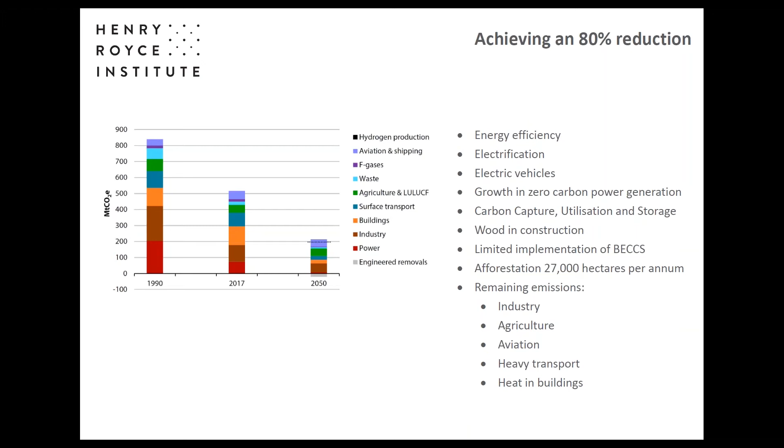And if we look at what we need to do to get there, well, we need to really get the last emissions out of our electricity system, and we quite likely need some hydrogen to do that. Buildings is an area of real challenge. All sorts of new technology is going to be needed, new insulation materials, and also probably some hydrogen there too. Transport, we may well need some hydrogen for our heavy vehicles. Industry, probably going to need some hydrogen there, but also a bigger drive for electrification, and also changing some of our industrial processes like steel making. In terms of waste, we're going to need to see much more recycling and a real focus on the circular economy. Important things to do in shipping, in aviation, etc. But hydrogen actually becomes a very important part of the picture. Could I have the next slide, please?

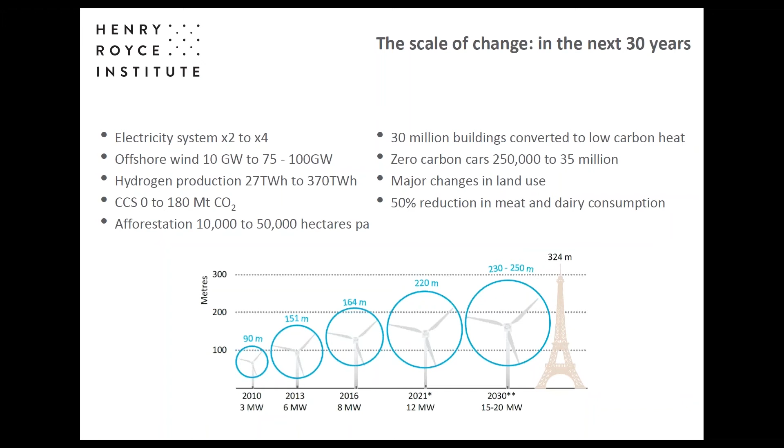I want to end on the note that materials and developments in materials are absolutely key to unlocking this transition and enabling it to occur at speed. There's going to need to be lots more work on hydrogen. That beautiful micrograph you saw earlier was from Bristol University, one of these beautiful nanostructures that we may be able to use for storing hydrogen.

Buildings are an area of particular challenge where we're going to need lots of low carbon materials: insulation, fuel cells, heat pumps, new ways of heating and cooling them. It's an enormous area of challenge where we really need lots of innovation, and of course building controls will be very important too. So again, lots more electronics that will need to be low energy. Electronics will be something that truly enables energy efficiency, just as lightweighting and new lightweight materials do. Ultra efficient electronics and ultra efficient communications are all a key part of this transition.

Decarbonising industry is going to mean using hydrogen, but also things like low carbon steelmaking, something the team at Sheffield and others in the Royce Institute are working on. Very crucially, we're going to need to see a move to the circular economy, looking at waste but also resource availability. Some of these key elements we're going to be using in all of these electric vehicles and things, we need to make sure we are recycling them continuously and not continually digging up the planet.

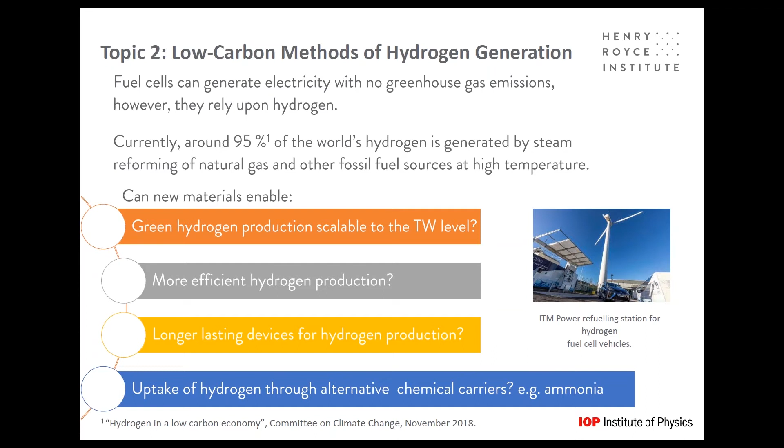The third topic we looked at was decarbonisation of heating and cooling. Now, 37% of the UK's greenhouse gas emissions arise due to heating and cooling. Caloric materials and thermoelectric materials can create carbon-free heating and cooling alternatives.

But how do we improve the performance, for example, of thermoelectric materials? And can thermoelectrics compete ever on efficiency with other technologies? How do we improve the performance of caloric materials? And we'll hear a lot more about that later. And can calorics replace current gas-based heating and cooling technologies?

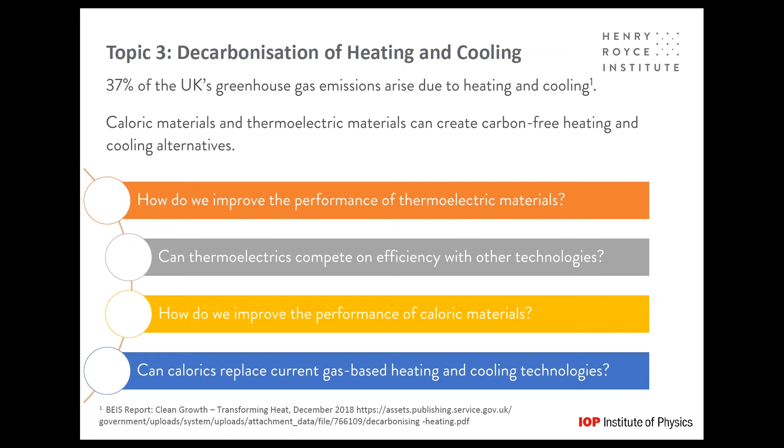Finally, we looked at low-loss electronics. And 40% of, as we saw in the cartoon right at the beginning, primary energy consumption is electricity, and 30% of all electrical energy passes through power electronics. And that's going to reach 80% in the next decade. 3 to 5% of global electricity is used by computing, and that's predicted to increase by up to 21% by 2030, or 8,000 terawatt hours.

So there's a huge, huge opportunity here, but what materials will enable more efficient power electronics? What materials can reduce losses in CMOS? And what materials will enable beyond CMOS technology? And finally, what is the technology readiness of these opportunities?

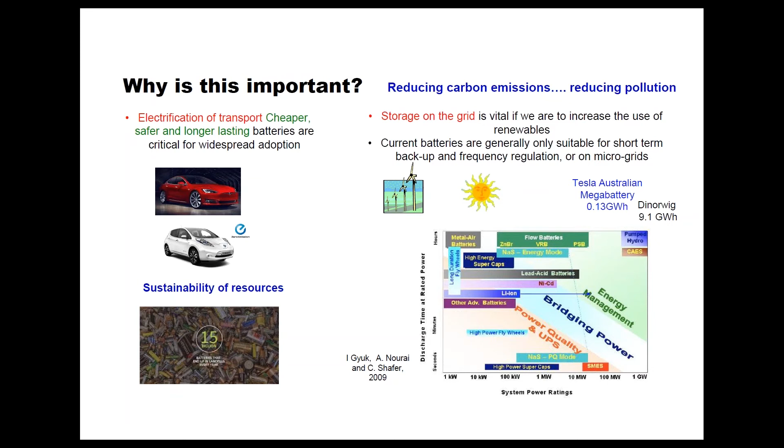And we're in the position now where batteries are doing a good job for short-term frequency regulation, but if we're really going to make batteries have impact on those sort of hydro systems, then we really have to scale up massively and reduce cost.

Next slide. So it's another important thing to recognize that we really are very close to the theoretical limits of the materials. And so we need, within the context of the 2050 agenda, to come up with radically new approaches if we're going to make impact.

So the price of the battery has come down by more than a factor of 10 since it was first invented, through new materials and some engineering. And the next improvements are largely going to be due to the scale, for example, of all the gigafactories that are being built around the world. But we're pretty much at the theoretical limit in terms of how much we can get from the materials that we're using in today's batteries.

So we've improved by about a factor of 3 from the original lithium cobalt oxide systems to the NMCs and other systems like that. But if we're going to make changes, we're going to have to come up with radically new chemistries and get them to work in a cost-effective way and deal with the safety consequences. And this little Samsung Galaxy phone is just there to remind everybody that even just trying to get 10% or 5% extra energy density has resulted in safety consequences.

Next slide, please. Then the other critical issue is sustainability and storage. So lithium, cobalt and nickel are all critical resources. And as electric vehicles are pushing towards lower cobalt and higher nickel contents, it isn't just the cobalt that is the issue, it's the nickel. And the resources are coming from parts of the world, such as DRC in terms of the cobalt.

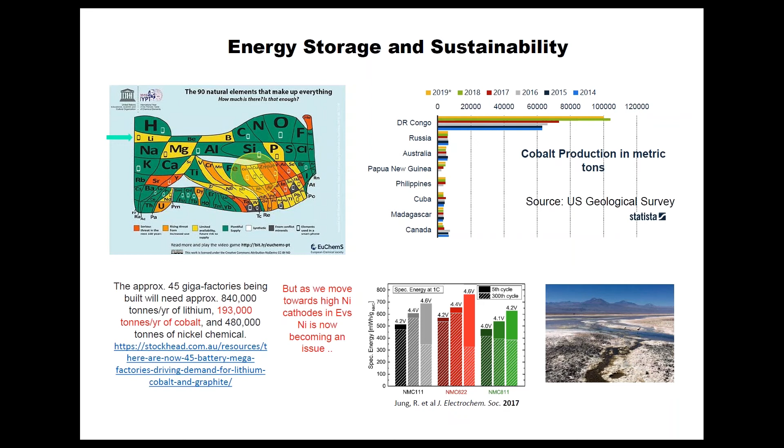But in the lithium, there are lithium brines being mined in Chile and Bolivia, some of the driest parts of the world, and they have environmental consequences for the people who live there and the animals that are in that habitat. And so increasingly, we've got to change the way that we think about batteries, moving them to being inherently recyclable so they're easier to pull apart, built into the whole design of the battery system. Next slide, please.

So there are some simple ways to reduce cost. We can make cheaper materials. We can think about making bigger batteries, but there's tremendous materials challenges in how you design a system.

You need to move the ions and the electrons in and get the same rate, and deal with the fact that batteries expand and contract throughout their lifecycle. There's a lot of fundamental science needed to determine or improve how we control materials in non-equilibrium environments—I'll touch on that in a minute. And then we have to do this in a much more efficient way, because the current battery assembly process itself produces a lot of carbon during manufacturing.

Next slide, please. So just to reflect on a few things, the first thing we need to do is stop batteries from degrading. The Faraday Institution was formed to inspire and lead the UK's battery activity, particularly in the automotive sector, and I lead the degradation project.

I think this is one of the critical ones, because improving the lifetime of a battery is inherently important in terms of sustainability and also cost issues.

Next slide, please. But it's not just about improving today's generation of batteries. For the 2050 agenda, we have to come up with radically new systems. There are simpler ones, like trying to get materials of higher energy density to work, such as silicon, which in principle offers a 10-fold improvement in volumetric and gravimetric capacity. Turns out that's less at the pack level, but nonetheless has to be achieved. A lot of challenges with it.

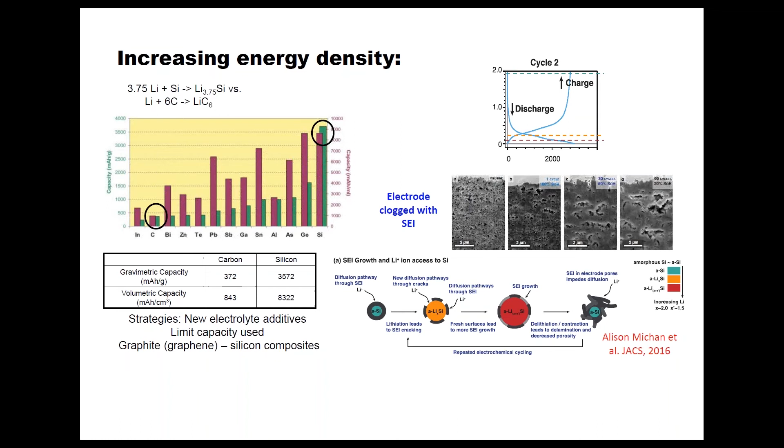Just to remind people, when you cycle a battery between charge and discharge, it operates outside its thermodynamic window, so the electrolyte decomposes as you're cycling to form this thing called the SEI. This continues all the time, and that's a degradation issue that has to be solved.

Next slide, please. We then need to think about whether there are other systems beyond traditional lithium ion. We could think about sodium ion batteries, good for the grid because they're cheaper. Magnesium batteries in principle give us the highest energy density, but as we all know as material chemists and physicists, it's much harder to move magnesium 2+ ions through solids. Turns out it's also harder to get them out of solution because they're well solvated. So a big challenge, but worth looking at in the 2050 agenda.

Next slide, please. And then we need to think about radically different systems. We have lithium sulfur systems, where dissolving polysulfides is an issue, but we need new ceramics to address that. The lithium air space has the highest theoretical energy density possible, the same as gasoline, both practically and theoretically, but there are lots of challenges because it brings together the challenge of a fuel cell and a battery.

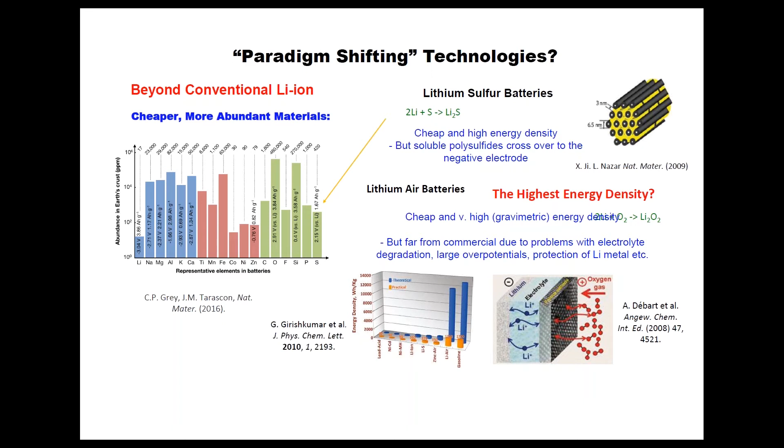Next slide. But progress is being made. This is just one illustration of work by myself, Peter Bruce, and others, using redox mediators to help shuttle ions backwards and forwards, getting closer to making this a viable technology.

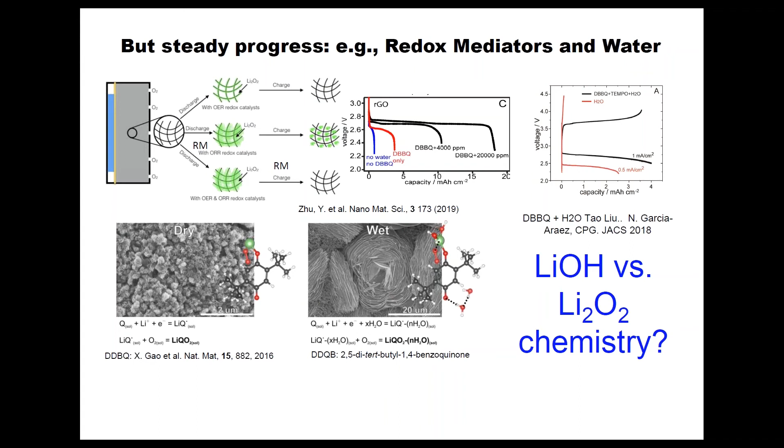Next slide, please. Then thinking about solid state batteries for improving ceramics, again thinking from a fundamental level: how do you move ions across all these multiple interfaces? How do you deal with volume expansions and contractions? Next slide, I'm almost there, Manish.

And then when you start really thinking outside the box, you need to move away from a confined system where the box—your electrochemical cell—defines how much energy density you have. With a redox flow battery, you can flow in as much liquid as you want to do the reversible chemistry, which starts to link together a battery and a fuel cell. While these systems are not yet any cheaper than lithium-ion batteries, they offer potential scalability. I think they're very much part of the future and should be part of any research agenda, particularly for batteries for the grid, and we should do that in the context of new fundamental science.

And so the next slide just gives you a couple of those. I would argue we need to understand how the processes from the atom level through the pack level work. We need to understand how to control materials under harsh and non-equilibrium conditions, and to understand and control how we design interfacial processes.

And we need to do this via in situ metrologies, to look at what's happening as the materials are operating. Next slide, please.

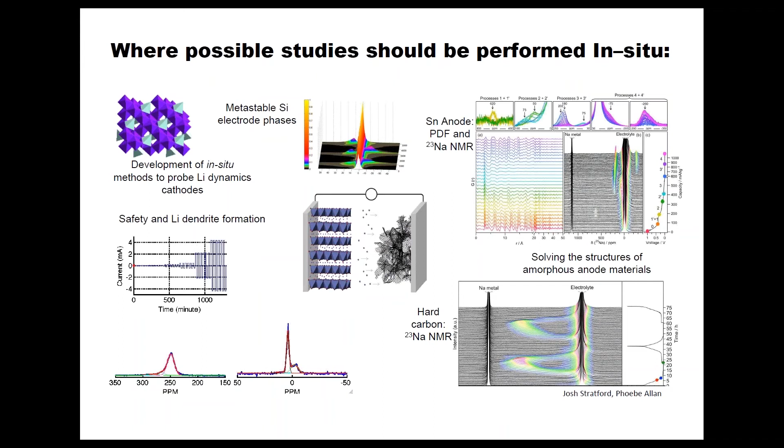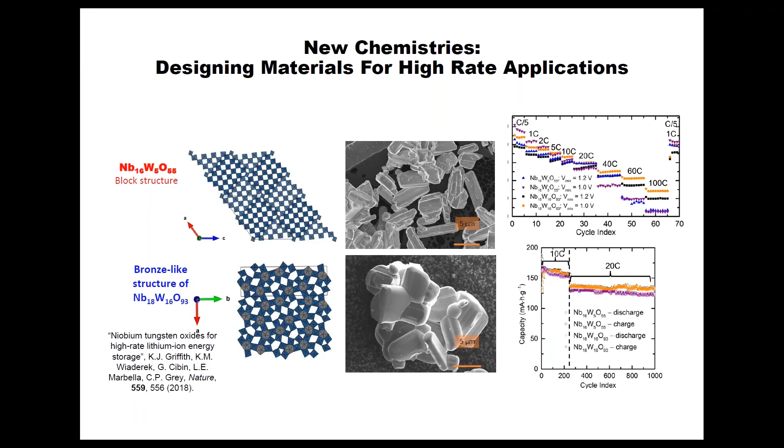And design new materials to make this happen. So this is just an example of some high rate materials for fast charging. I just want to end with the final slide by saying there's a lot of space out there for different chemistries and new science, but it's a really challenging process where we need to understand from the bottom up how to control metastable processes and non-equilibrium systems. So thank you very much for listening.

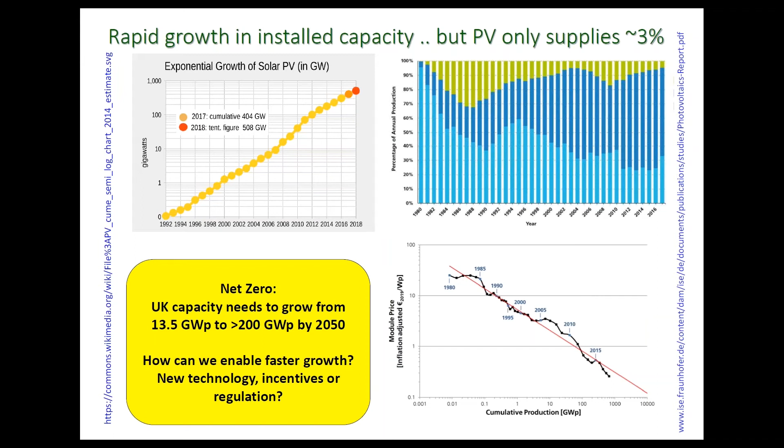Next slide, please. So we can identify three areas. One to do with the fact that solar is a variable resource, so there's a danger of oversupply when the power can't be used. That increases the overall cost and reduces the value of the power. Then there are issues to do with the cost of the technology and to what extent that can reduce, which is a function of the module, but also of the way it's integrated into the system. And then there are regulatory issues that will influence how fast and in what way the technology can grow.

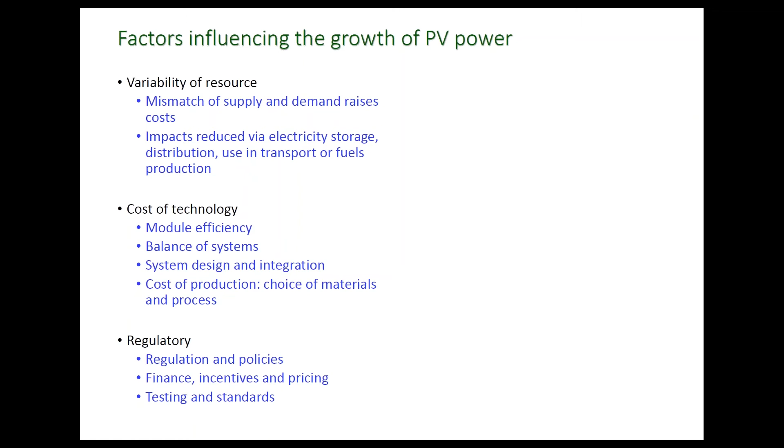Next, please. So some of these involve issues for material science, not all. The cost of the PV technology in particular is influenced by factors such as the electronic and optical quality and the stability, not only of the semiconductors we use to harvest and convert the light, but also the materials we use as contacts, as electrodes, as optical coatings, and the materials we use as parts of the system.

Next, please. But there are also materials science issues for the associated technologies which we will depend on in the end for integration of PV into the energy system. Claire mentioned the need for stable and high performance battery materials. Storage is a very important part of integrating PV. Then there are also the associated technologies of transmission, distribution, and the use of solar power, for example, in fuel synthesis, in transport, and so on.

Some of these issues will be addressed later in this talk. Next, please. So thinking about PV in particular, and coming back to the road mapping exercise that Neil talked about, there are a number of directions in which we could go from the state of the art, which is crystalline silicon, which currently dominates about 95% of the market.

And one obvious way to go is to try to make crystalline silicon technology better and cheaper by working on the manufacturing and the design of the crystalline solar cell to improve its cost effectiveness, extend its lifetime, and improve its efficiency. Next, we can also go in the direction of trying to make silicon better by adding something to it to increase the overall efficiency.

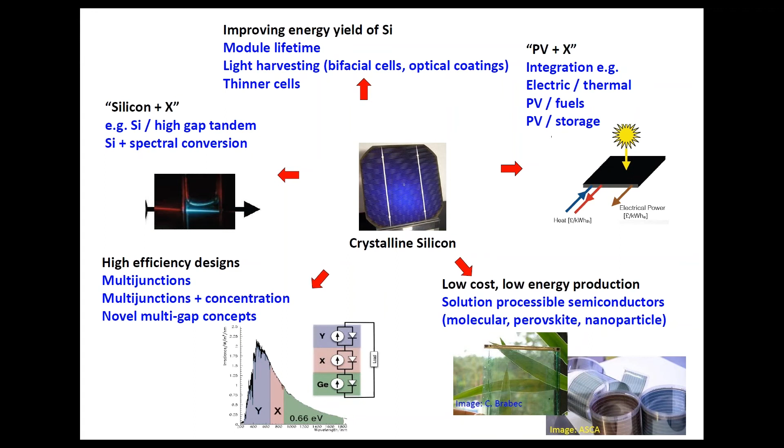So I'm going to give just two short examples from this list. The first example is something actually being developed and commercialized in the UK: the idea of putting an extra layer on top of silicon to turn, say, a 24-25% silicon solar cell into maybe a 27% or higher percentage tandem device.

That can be done by using a layer of perovskite PV technology. Perovskites offer band gaps which are reasonably close to the optimum for making a tandem with silicon. To do that efficiently and well, there are a number of material science issues, including controlling defects in the perovskite, trying to minimize the lead content, and work to do on the silicon itself, including its design and improving the compatibility of its surface with the layer deposited on top.

We also need to think about the manufacturing process, making sure that in manufacture, recycling, and use, exposure to toxic components is minimized and the overall embedded energy is reduced. So that's one specific challenge.

The second example is where solar cells could be used in non-conventional markets. For example, there's a growing demand for PV to power small mobile components, such as in the Internet of Things. There's also the use of solar power for satellites, for the growing communications industry. That's a relatively high value industry, and IoT is something growing very rapidly.

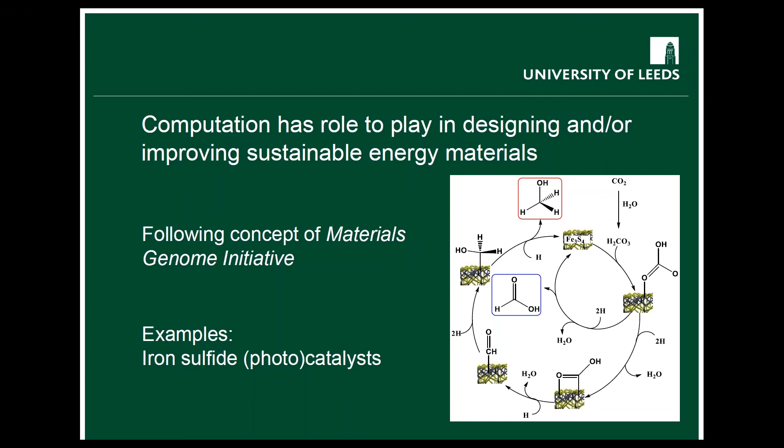So we had a look at iron sulfide for a number of reasons. First, there's an intriguing origin of life theory that posits that iron sulfide particles created in black smokers, either alkaline or acidic black smokers in the Archaean ocean, formed these tiny iron sulfide nanoparticles that were actually catalysts in the origin of life, converting dissolved CO2 into small prebiotic organic molecules that eventually led to life evolving from the sea. Whether this is true or not, we don't know, but it's an intriguing concept, and we thought iron sulfides, for many reasons, are interesting to look at.

Another reason is that in enzymes you have reactive sites based on cubane iron sulfide and iron nickel sulfide cubane particles, where a lot of electron transfer takes place, acting as catalytic sites. Plus iron sulfides, with their multiple valence states, are very good electron cycling materials. So we were interested in looking at these to see whether we could convert CO2 into useful chemicals or synthetic fuels, which would help a lot in a carbon net zero future.

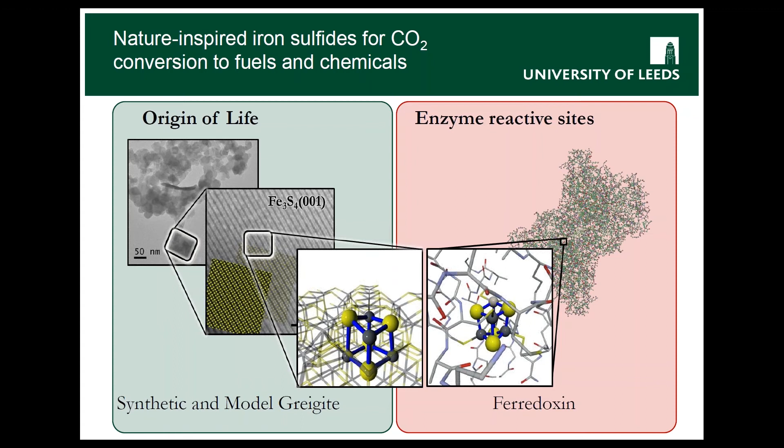One of the reasons we looked at these materials was because they would be quite good for both modeling and experiment. We were also interested in solving a problem in the literature: whether the alkaline or the acidic environment would be best for this origin of life theory.

So we started with calculations looking at the three types of carbon dioxide molecules that exist in these three pH regimes. In a very acidic medium, you would have dissolved CO2. We adsorbed those and calculated the binding energies to two major surfaces of these tiny mineral particles, the 001 and the 111 surface. At pH 6.5, bicarbonate would be the main species, and at a very high pH, it would be a carbonate molecule.

So we attached all these molecules and did calculations of them binding to the two surfaces. Looking at the energies, the bicarbonate and carbonate both attach to the 111 surface and also to the 001 surface. However, in an aqueous medium, it's a competition between the carbonate molecule and the water molecule. If you look at the binding energy of water, it's clear that only on the 111 surface can the bicarbonate molecule actually displace the water molecule from the surface, and therefore that should be the only catalytic regime where you could convert the CO2-based molecule to something else.

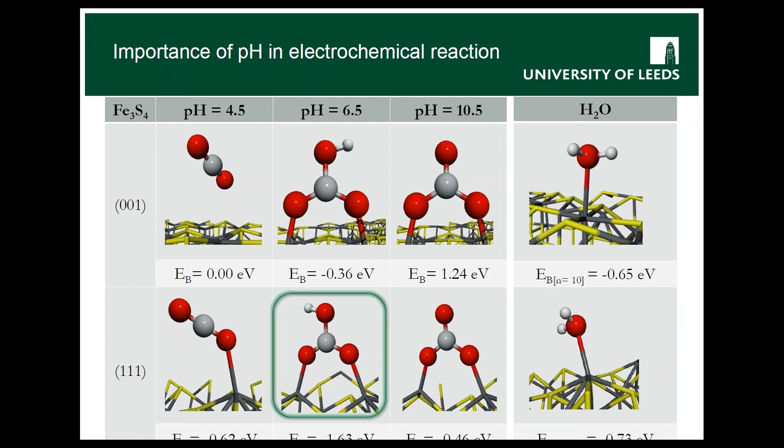Then we did calculations of the mechanistic catalytic pathways, and starting from the adsorbed molecules at the surface, you go through a lot of intermediates. This is actually a good example to show that we need a lot of computing power. Computing is often thought of as a cheap technology where you don't need heavy lab-based equipment, but you do actually need quite a lot of computing power. We're fortunate in the UK to have that through Archer 2 and its predecessor National Computing Facilities, which really helps make the UK internationally competitive in computational sciences.

So we calculated all these intermediates and pathways, and found that you can get through the mechanisms within a reasonable voltage of about 1 volt, which we wanted to stay within so that this process could be powered by solar energy, for instance. You could get both methanol and methanoic acid, which are very good as a fuel or a chemical itself, or as a precursor to many known pharmaceuticals, fuels, etc.

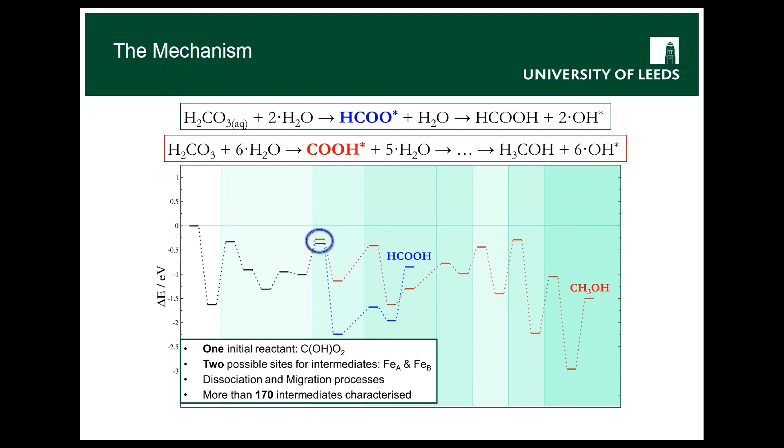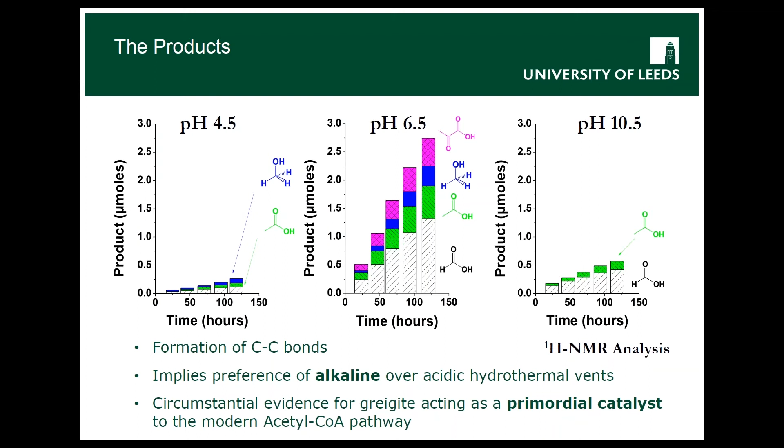Of course, in the end, the proof of the pudding is in the eating, so we did experiments as well to see whether with these novel catalysts we actually got the products we were looking for. The calculations were right in predicting that at pH 6.5 we would get the best catalytic performance. We do indeed produce methanol and formic acid, but more interestingly, we also form C-C bonds, with both pyruvic acid and ethanoic acid forming at pH 6.5. This is particularly interesting because pyruvic acid is accepted as a small organic molecule important on the pathway to bigger biological molecules.

Very quickly, I promise, an example of another piece of work where we collaborated with experimental colleagues at Eindhoven University, looking at iron pyrite, another sulfide material, for photocatalysis.

It should be a really good photocatalyst, but it has experimentally shown limitations, even though theoretically its potential would be very good.

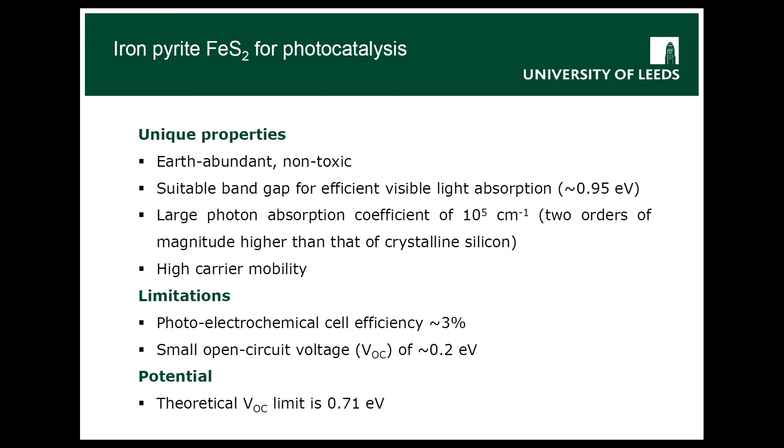Now, originally it was often thought that marcasite, which is the same composition but a slightly different structure, if you get inclusions in pyrite, would bring down the potential of pyrite as a photocatalyst. This was because an early experiment had shown that the band gap in marcasite is much lower than in pyrite, making the material less well performing. However, recent theory and experiment have both shown that the band gap in marcasite is actually much higher and similar to pyrite. So there is no reason why marcasite should have a negative effect on the pyrite material.

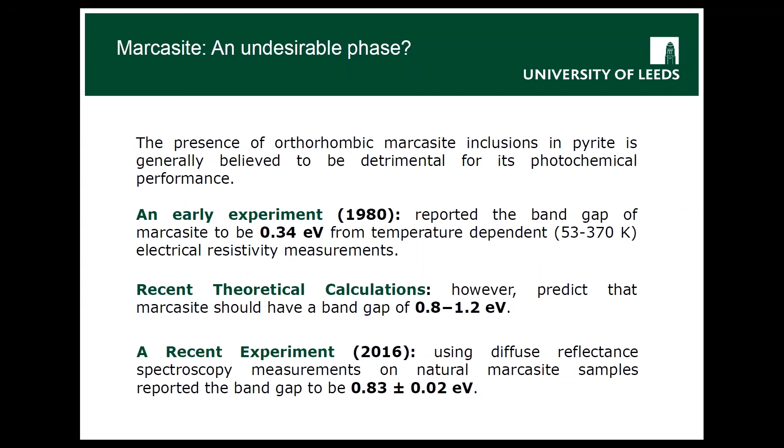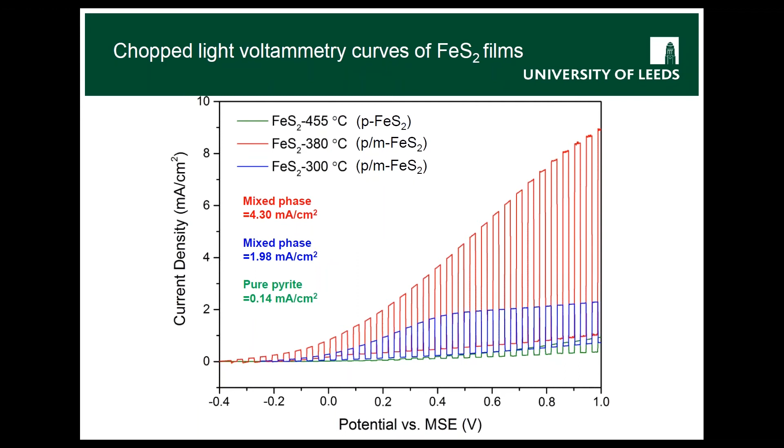So we did an experiment, or rather my colleagues in Eindhoven did an experiment, and they showed that if you have pure pyrite, the green curve, you get a moderate response as a photocatalyst or photoelectrochemical material. However, if you have a mixed phase—they created two mixed phases at two different temperatures, the red and the blue—you can see that particularly the red phase, synthesized at 380 degrees C, has a much better photo response than the pure pyrite material.

So then we did some calculations to explain this and look into why this could be the case. When you align the band gaps of the pyrite and the marcasite, taking into account the vacuum level, you find this type of setup: if a photo-excited electron is created in marcasite, it would go to the conduction band, but because of the different alignment of the two materials, it would then flow into the conduction band of pyrite. Whereas if a hole is created in pyrite, it actually flows to the valence band of marcasite. So you get a very effective separation of the two charges, which is necessary in a good photoresponsive material.

So the modeling here explains what was shown experimentally: if you have a mixture of marcasite and pyrite, you should get a much better photoresponsive material than with pure pyrite.

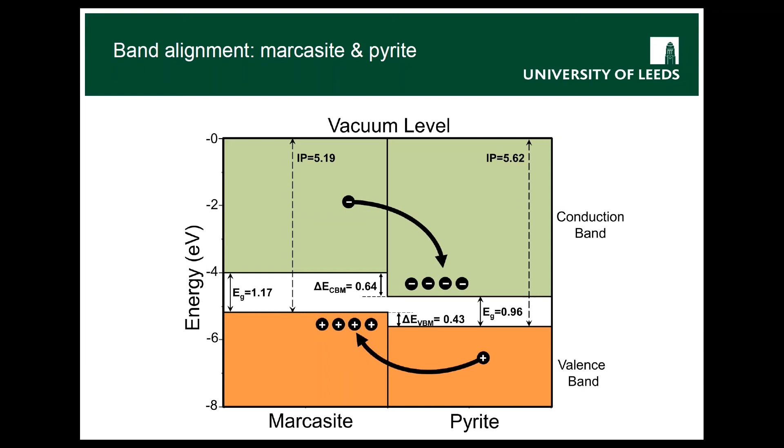That was just the two examples I wanted to quickly show, and I hope I haven't gone too much over time. Just to acknowledge the people who did the work: Alberto and Nelson for the modeling, and Nathan and Longfei for the experiment. Thank you very much for listening.

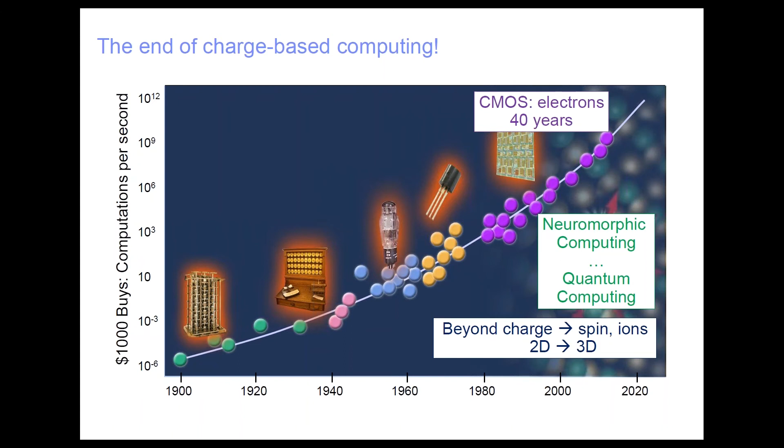Let me briefly touch on spintronics. Spintronics is the notion that in heterostructures consisting of alternating layers, on the electron scattering length scale, of metals and insulators, non-magnetic and magnetic materials, we can build structures in which we control the flow of currents of electron spins. An electron spin current innately can carry no charge, and therefore can be dissipationless and use much less energy. The first device that uses the control of spin currents, or at least spin-dependent scattering of electrons, is something called a spin valve, which I played a key role in inventing 30 years ago. This has been used in magnetic disk drives to sense tiny magnetic fields, because it's basically the most sensitive detector of tiny magnetic fields known at room temperature.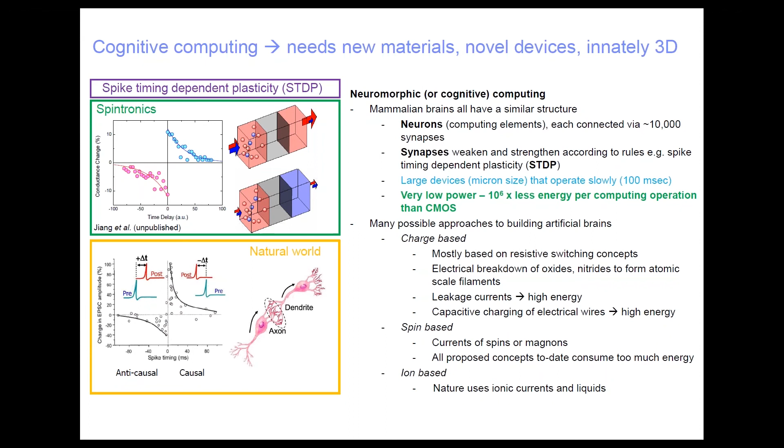I just wanted to conclude by saying I think there's a lot of opportunity to build low energy electronics by going beyond charge, by using spin currents, and by building racetrack memory. There are enormous numbers of new chiral spin textures that have been discovered in the last few years, which are very interesting to build, for example, a reservoir type of computing with regard to cognitive computing.

I think building synaptic functions not in individual devices, but looking at systems of devices connected in a three-dimensional way to examine their emergent properties, will lead us to highly energy efficient thinking devices in the next few years. That was the end of my talk.

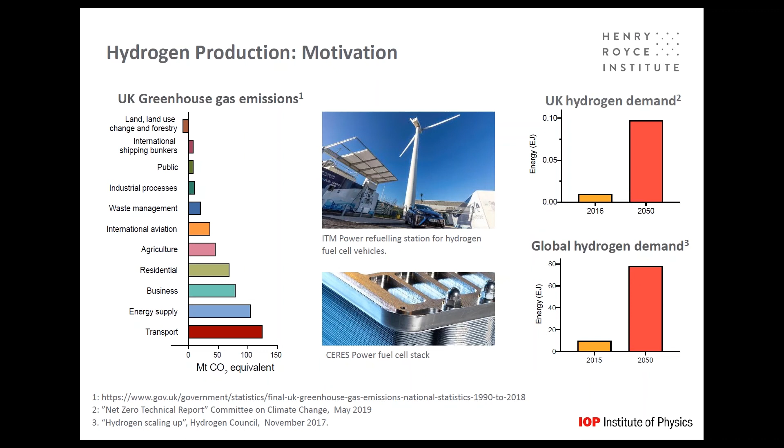Let's move to the next slide. So we did a consultation of 20 academic institutions and national labs and 6 companies looking at developing new materials for hydrogen. Let's move to the next slide.

Right now, hydrogen is used to produce chemicals like ammonia or methanol in large-scale thermochemical reactors at high pressures and high temperatures - that's a very steady state. So if you get electrolytic hydrogen from solar and wind, it will be produced at low pressures at constantly varying rates. Hence, we need new catalysts and other materials that operate at low pressures and low temperatures for thermochemical synthesis.

Alternatively, we could do away with molecular hydrogen altogether and produce these chemicals by the direct reduction of nitrogen or CO2, as Nora discussed earlier. Again, we need better catalysts, electrodes, and electrolyte materials.

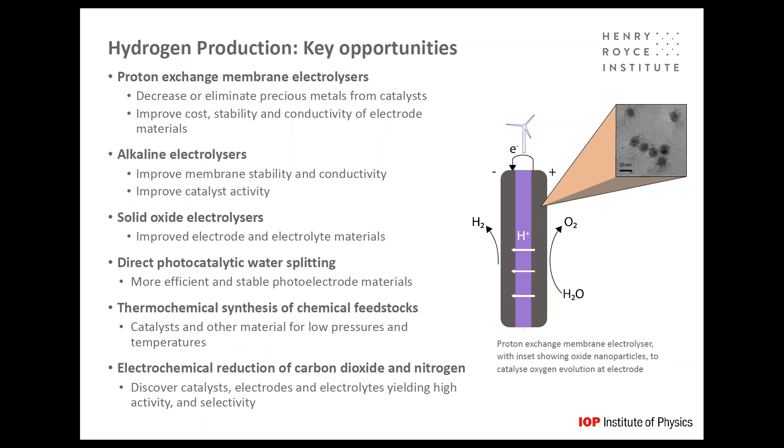What we require is state-of-the-art facilities, world-class scientists and engineers, and a lot of integration across the UK, academia and industry, and also strong integration into international partnerships, research programs, and value chains.

One thing that came out of our road mapping exercise is that we noticed a big discrepancy between lab scale testing in academic labs and the full cell electrolyzer testing done on stacks in industry. Material that works well on the lab scale doesn't necessarily work well in industry right now. So we need routes and facilities for testing new materials at single cell prototype level to bridge this divide.

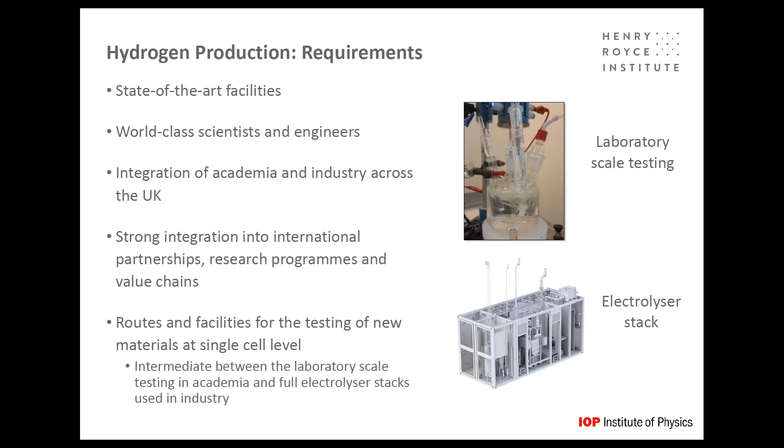Hydrogen is particularly attractive, as Julia King mentioned before, for decarbonizing some of the areas that are most difficult to decarbonize, such as heavy-duty vehicles, heating, or industry for production of steel, methanol, and ammonia. So if we build a strong homegrown industry in the UK for hydrogen, we can become Europe's leading exporter of hydrogen. Thank you for listening.

I'll now pass the floor back over to Richard.

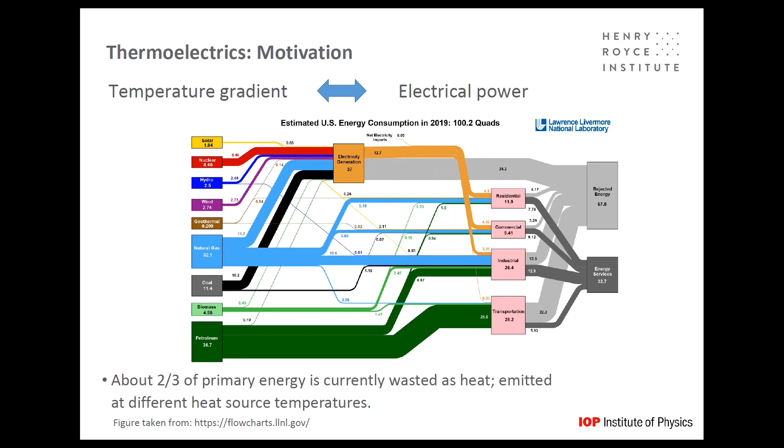We should not look at thermoelectrics in isolation, and there are possibilities to use other heat engines or to store the heat for use elsewhere. It can be transported or converted to electricity using thermophotovoltaics or thermoelectrics. Some advantages of thermoelectrics lie in the lack of moving parts, their semiconductor nature, and high reliability.

Thermoelectric generators made with different materials are available over a temperature range from over 1,000 degrees Kelvin down to room temperature, noting that near room temperature is where the largest amount of waste heat is generated.

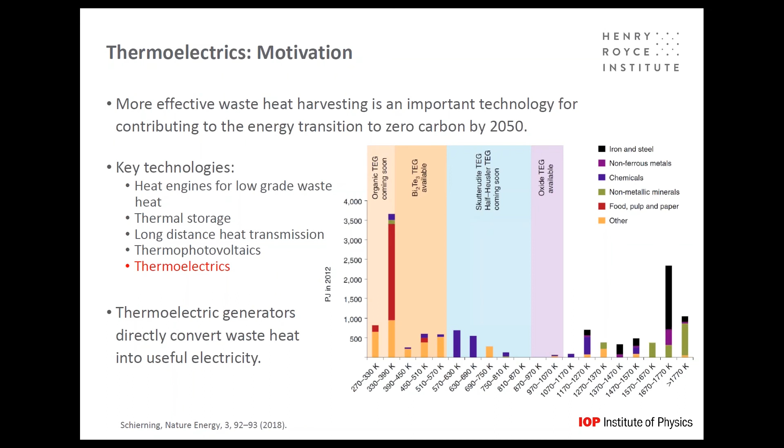Nonetheless, there are already applications for thermoelectrics in so-called Peltier cooling devices, which are refrigerant-free and have no moving parts. There are also applications for recuperating industrial waste heat, and the concept has been explored in the automotive sector to improve fuel efficiency, again by a few percent.

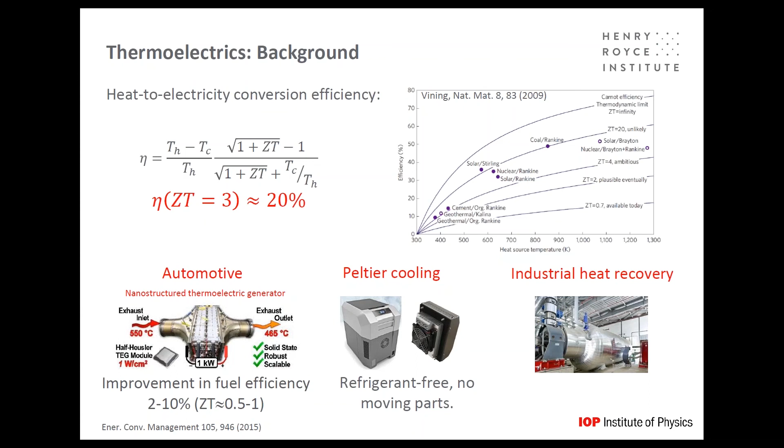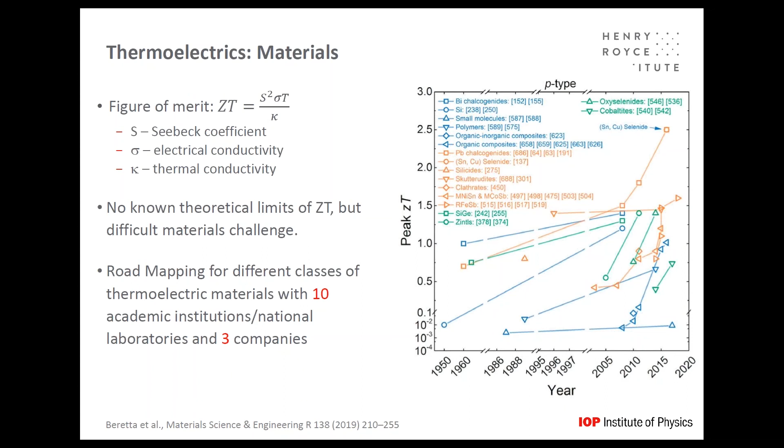This road mapping process, which has involved 3 companies and 10 academic institutions, has focused on a range of thermoelectric materials, from the most established, like the chalcogenides, to those with new and emerging physics.

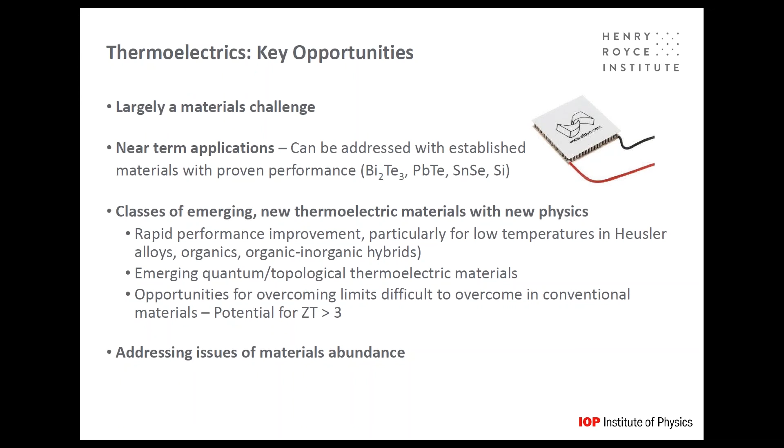We focus primarily, but not entirely, on materials challenges, since a step change in the figure of merit in the medium term would open up vast new applications for thermoelectrics. However, there are also many applications accessible in the near term through developing thermoelectric generators using materials of proven performance. Nonetheless, it's in materials with new physics that we can search for a step change in energy conversion efficiency—aiming for figure of merit values greater than about 3. We can also consider developing materials that avoid rare elements, such as tellurium, currently widely used in thermoelectric devices.

The research challenges include developing a more complete understanding of structure-property relationships at the nanoscale, including heat and charge transport across interfaces and in amorphous regions in materials. This is both an experimental and computational challenge. We would also benefit from improved accuracy of thermoelectric property measurements, and device prototyping will be important for developing new applications, improving efficiency, and incorporating new materials into devices. Scale-up issues include abundance and cost of materials, as well as full life cycle analysis when new materials are introduced. All of this requires close cooperation between academic and industrial partners, and in the UK we have plenty of both.

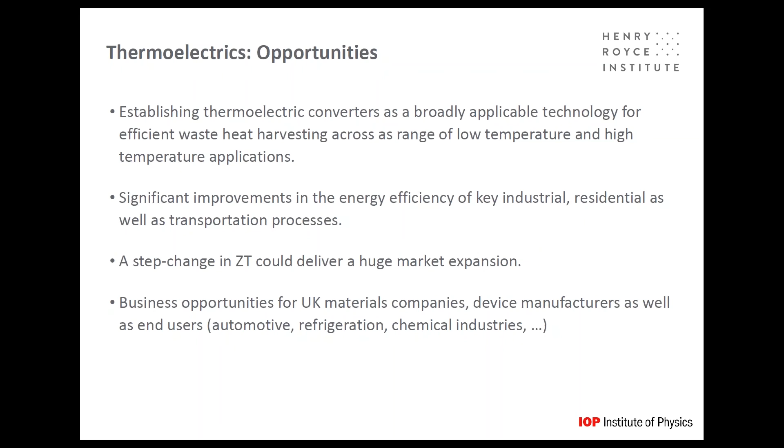The opportunity is to move thermoelectrics from a relatively niche technology to something broadly applicable that can deliver significant improvements in energy efficiency in key industrial, residential, and transportation sectors. A step change in ZT could deliver a huge market expansion in waste heat harvesting and heating and cooling technologies, creating opportunities for existing UK companies working in this area, as well as end users. Thank you very much for your attention.

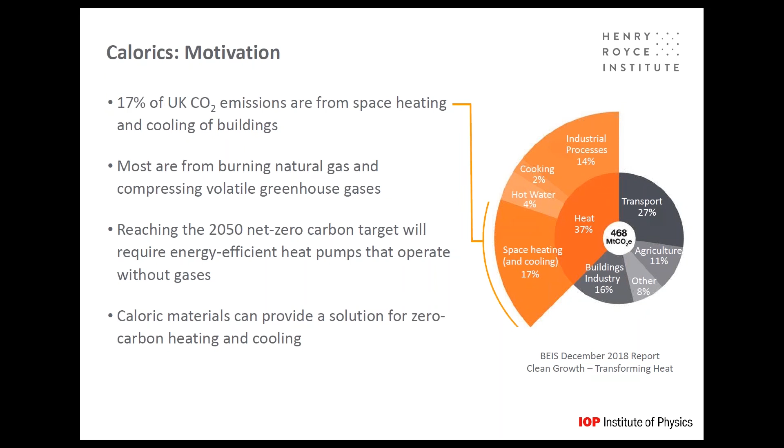Traditional heat pumps and air conditioners exploit phase transitions in fluids between a gas phase and a liquid phase to achieve heating and cooling. When sufficient pressure is applied to the gas, it transforms into a liquid and energy is released, increasing temperature. When pressure is removed, the liquid transforms back to gas and energy is absorbed, decreasing temperature. By repeating this cycle, we can achieve heating and cooling.

Caloric materials operate under the same principle, but instead of exploiting a phase transition between a harmful gas phase and a liquid phase, the material always remains solid and therefore does not pollute the atmosphere.

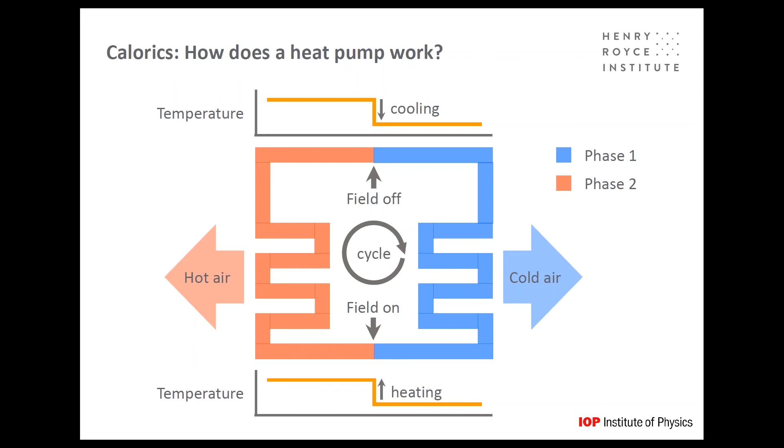With this motivation, a roadmap consultation on materials under the aegis of the Henry Royce Institute was conducted with the participation of 8 academic institutions and 2 companies. After this consultation, key challenges and opportunities have been identified. Overall, for this technology to succeed, research is needed across all technology readiness levels, both in academia and in industry.

The 4 strands of caloric materials - magnetocaloric materials driven using magnetic field, electrocaloric materials driven using electric field, elastocaloric materials driven using stress, and barocaloric materials driven using pressure - present different challenges, partly because of their different nature and partly because of their different level of maturity.

Fewer prototypes exist for the barocaloric materials, but there is plenty of optimism given that the thermal response is extremely large and, for the first time, comparable to the thermal response of the gases currently used in existing heat pumps and air conditioners. Moreover, there is plenty of room for discovery of materials with even better performance.

For magnetocaloric materials, key challenges are reducing cracking under magnetic field in order to extend operating life, and reducing the magnitude of the driving magnetic field in order to reduce cost of permanent magnets.

For electrocaloric materials, key challenges are improving fabrication of multilayers and increasing breakdown field in order to achieve larger thermal capacity. For elastocaloric materials, key challenges are reducing material fatigue and increasing breakdown stress in order to extend operating life.

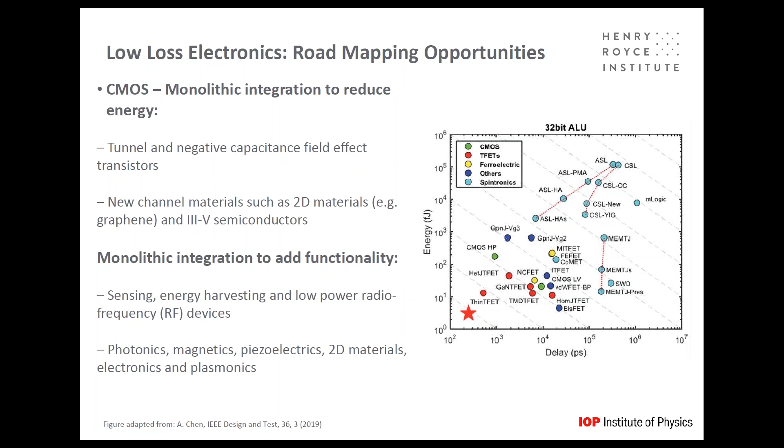So those are the first two areas we looked at in the road mapping exercise, things that have impact on manufacture now. The third area, which has been very well introduced by Professor Parkin this morning, was what are we going to do beyond the current materials and devices we have - going beyond CMOS into what's called 'more than Moore', beyond Moore's law, which has helped dictate what's happened in the computing industry up to now.

But here we need to use different devices and different materials from conventional CMOS - things like spintronic, topological and organic materials, and use, as we heard earlier on, chargeless computational schemes and collective switching.

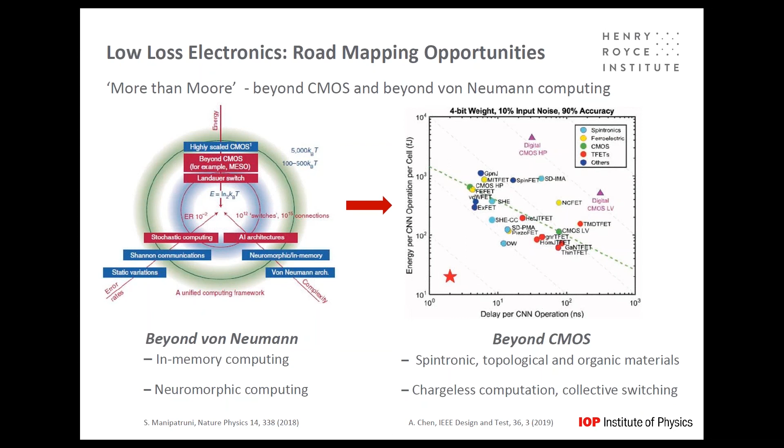So if we think about where we are now, we have world-class scientists and engineers in the UK and some state-of-the-art facilities. Now we can take those and combine them with new approaches based on big data and artificial intelligence for materials discovery. We can look to add in piloting of new materials all the way through from fundamental research to wafer scale fabrication and manufacture, and then look at the real importance of materials recycling, testing and metrology.

If we can put all that together in the UK, then we can deliver a transformative program to meet society's increasing energy demands while reducing its carbon footprint. We can attract industrial investment into the UK and capitalize on our real strengths in advanced materials. Importantly, we can enable the UK to be the internationally leading innovator in the device supply chain for electronic devices, and provide that sovereign capability for the UK. Thank you very much.